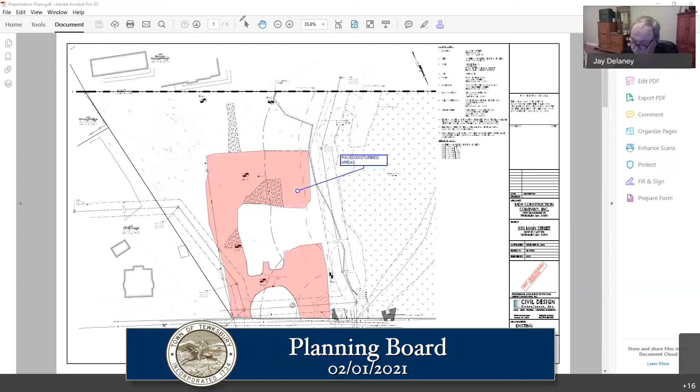I'm sorry, I'm on annotation right now. Let's see if I can turn that off.

There we go. This is the layout we have for you tonight, largely the same layout we presented conceptually back in October. The plan is to consolidate the two curb cuts into a single curb cut, which gives driveway access to the 9 structures, 8 of which will be townhouse style duplexes—4 on the left-hand side and 4 on the right-hand side of the driveway.

Each of those is a 3-story unit, which is the height requirement for this overlay, and each is a duplex. The last building is a 3-story building with an office on the first floor, and residential units on the second and third floors, making a total of 18 residential units plus the office space on the first floor. The applicant has indicated he's intending to have his own office there, so there's already a use in line for that commercial space.

In addition to the mixed use development portion, part of the land purchase agreement with the town was to provide 20 parking spaces for the Tewksbury Housing Authority, shown at the rear of the parcel, right on the property line shared with the Housing Authority property behind. Those 20 spaces will be dedicated for use by the Housing Authority. There's no plan to touch the floodplain overlay, so we're filing for special permits under the town center overlay district.

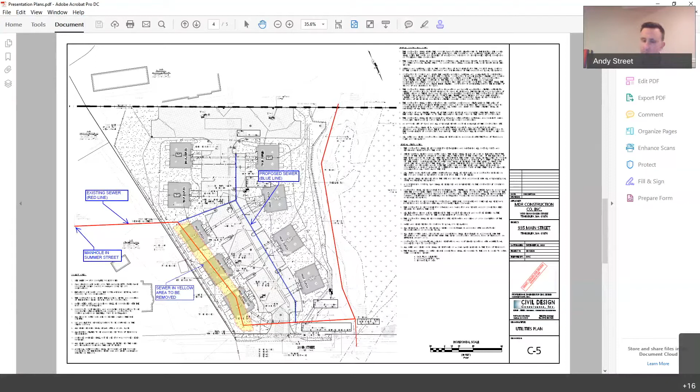To allow this development, we are requesting 2 waivers, one of which is a waiver to allow these parking spaces for the Housing Authority to be within the required setback from a property line. We could pull them away, but the intent of those spaces is to best serve the Housing Authority, and getting them as close as possible is desirable.

So we do want to request that waiver to allow that. The second waiver we're requesting relates to these duplexes—according to the parking table, they require 3 spaces per unit. If these were triplexes or a bigger multifamily building, it would only be 2 spaces per unit required, and we're requesting relief to provide only 2 spaces per unit. We do have adequate parking for the commercial space as well, and those would be dedicated parking spaces.

As far as permitting goes, we need the permits mentioned from this board, and then we'll continue working with the Conservation Commission toward hopefully an order of conditions. And because we're tying into Main Street, doing some work in the right of way, we'll need a highway access permit as well.

So moving forward with where we stand, we received comment letters from the fire department, the Conservation Commission had that meeting as I mentioned, and also from town planner Ms. McGinty, we received her comments late last week. As far as the fire department goes, there were some general comments from the fire code listing requirements that need to be met.

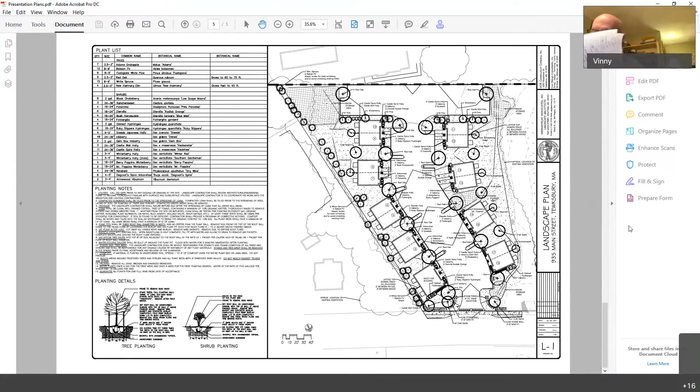Another question I had while I have you here is, this is probably for Mr. Street—on the plans you have the location of the mail receptacles. Now how does that process work? Does that go in front of the postmaster first, get approved, and then come to us?

Well, we've done several of these projects with mailboxes at this point, so it's kind of evolved on our end. My intent here was to acknowledge that there will need to be a community mailbox, and if there's any feedback from this board that might change the layout, things can happen at this early stage. But once we got to a certain point, it would certainly be coordinated with the postmaster and signed off on as far as location goes. So right now it's really more of an acknowledgement that a mailbox will be needed, and we'll take it from there and work with the post office.

I can also speak on my experience at 1390—we did exactly what the post office wanted. They wanted a community mailbox, they consented to the location, and we built exactly what they wanted there. There's been no problems at 1390. Okay, that's good to hear.

So I guess, Mr. Street, what happens if they don't like that location—is there another alternative spot you can put it? Yeah, I think we have several options, and we've had a pretty good working relationship with them too, trying to figure it out as well.

Okay, yeah, I'm confident we can find a suitable location for them. Great.

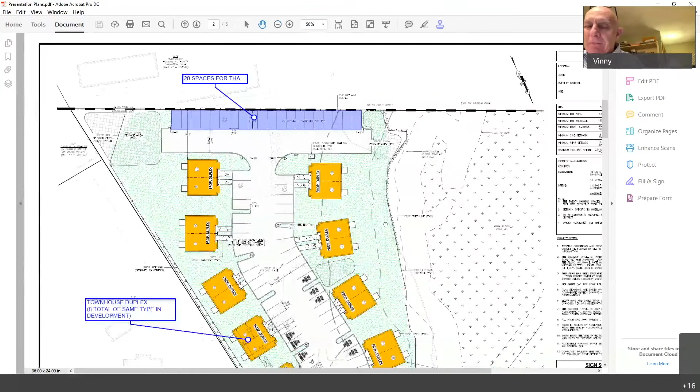I'll ask one more question and let my other board members kick in. So you don't have approval from the fire department yet, correct? No, we do not have approval, I guess. We got a comment letter with a handful of standards and requirements we need to meet, and we feel like we meet them. So I would expect future correspondence, but we'll certainly respond to what's in that letter and see what comes next.

Yeah, okay great. All set, Mr. Chairman, for now. Thank you.

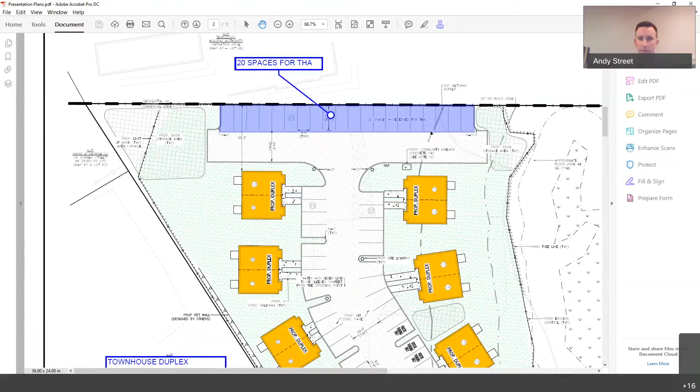The next thing - in every project we've had, we've talked about sidewalks. Do you think we should have a sidewalk at least walking to the mailboxes? Well, one of the comments was the sidewalks on Main Street, but the sidewalk on Main Street isn't going to get them to the mailbox. I believe the mailbox is going to be right off the edge of the parking area. Have we found a location for it yet, Andy? As of now, we're showing the mailbox towards the rear of the site. It's on the plans, towards the rear of the site here, but we'll coordinate that with the post office as well. I see it right there now, Andy - it's easy access to the mailman. Correct, and they would walk on the pavement to get there. A sidewalk certainly wouldn't be a big deal, but it's just another added expense.

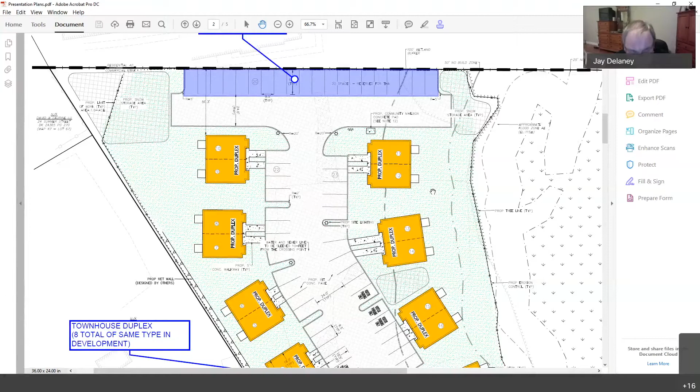Like I say, we've dealt with all our projects, and I don't see any - how does, shouldn't there be sidewalks at least if the people are walking? It's just something I think should be looked at and decided upon, because I haven't heard any of my board members bring up the sidewalks on the property. And not to be a smart guy, but if the project doesn't get approved, where do we put the trees back? I can't answer that question. Okay, so the trees are cut. I have heard complaints - there was nothing put up, fences or anything else. As a matter of fact, some people could actually fall off the sidewalk. So the safety portion for elderly people at the back of that project has not been addressed. There is no sidewalk. And another thing that's hit me too, is if the sidewalks were there, the elderly would be able to use them to walk through the project to get to the bus, the Lowell Transit Authority. So these are the different thoughts I have in my mind.

This whole property originally was going to be for the Housing Authority, from what I understand, and it's not happening - not happening the way I think the state intended it. So these are the different things I am addressing with you, and I'd like to see it done. I'd like to see the buffer added between the parking spaces and so forth. I think what could happen here is that some of the units might be able to be moved a little bit to get that buffer in, or to do what we have to do to make it a better place for the elderly as well as the new tenants going into the property. And I think that will just about do it for me tonight.

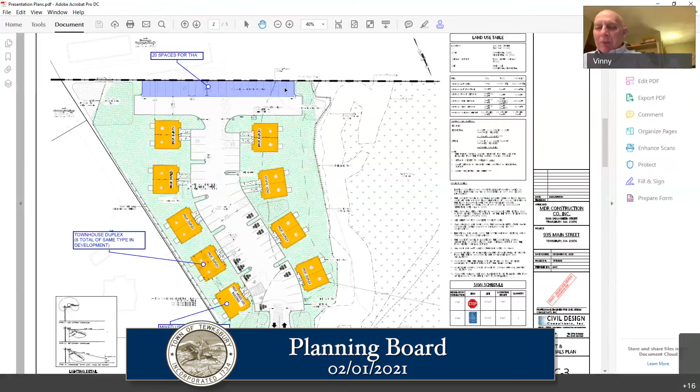All right, Chairman, I have some comments if I could. Mr. Fratalia. Thank you. I've been listening to everybody and it's all good conversation, but a couple things we haven't discussed: one is the fact that we need a lighting plan going forward. There's going to be lights back in that parking lot as well, so we need to see that. And the other question is, Mr. Street mentioned earlier about the affordable housing component and that all of them will count. In order for all of them to count, you need 25% affordable, so that would be 5 units. So that's not going to work as far as notifying the public that all of them will count. I don't think they will.

Okay. All right, that's it from me for the board. Thank you, Mr. Chairman.

All right, so with that, do we have anybody on the line who wishes to call in? We have no callers at this point, Mr. Chairman, but we are. All right, I'll stretch it out for just a moment.

So just as a recap, you guys are going to put together something on the buffer/fence/something in the back section there with the parking. Try to pull together the RFP information with a packet, that way we have that, and address some of the rest of the questions that some of the board asked.

We usually only need about 30 seconds to see if anybody's going to call in, so I didn't stall for that long, but you don't have anybody calling in, correct? Oh, Mr. Chairman, if I may. Mr. Rada. Yep, thank you.

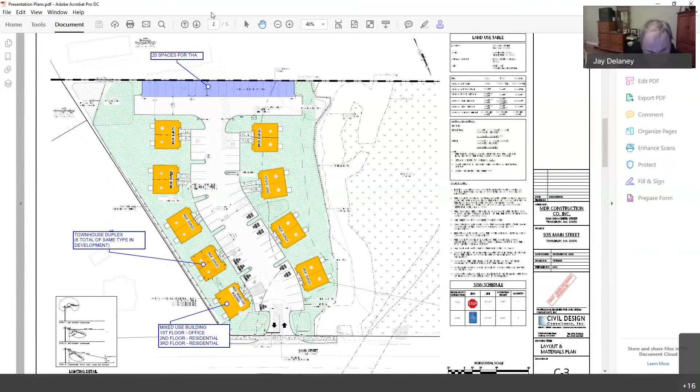All right, moving on to agenda item D, 1650 and 1668 Shawsheen Street, modification of site plan special permit.

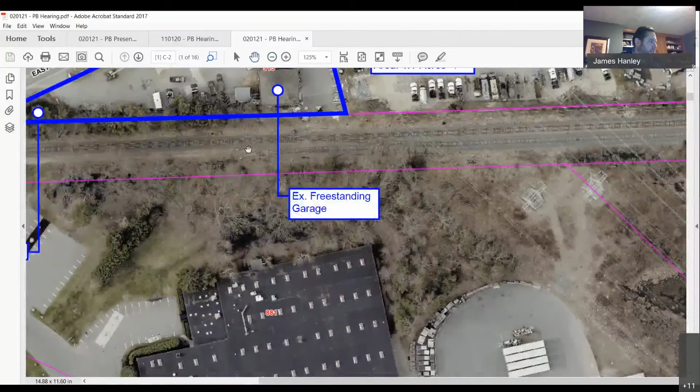At the time we came in front of you, it seemed fairly straightforward, and since then it's kind of evolved a little bit and caused a little bit of a delay. I'm just trying to explain that. So we have this freestanding garage, and the plan is to come down here with a garage addition over existing pavement.

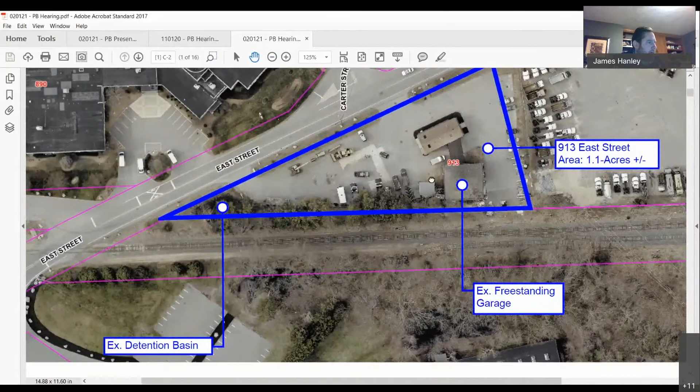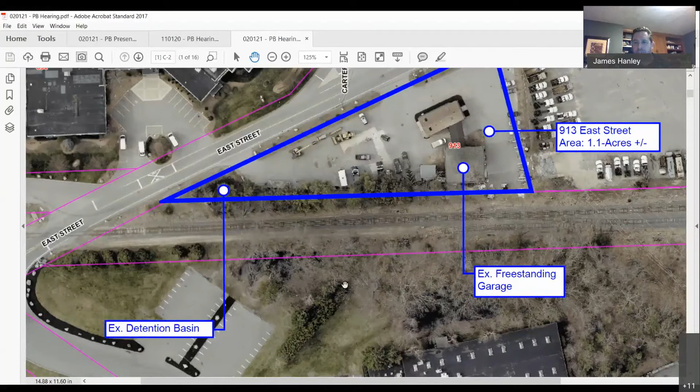Around the last time we sat down with you, we were unaware of a wetland that was actually located across the train tracks, on the abutting property. Our development is within 100 feet of that wetland, so that brings DEP stormwater management regulations into play, and it also brings Conservation Commission's regulations into play.

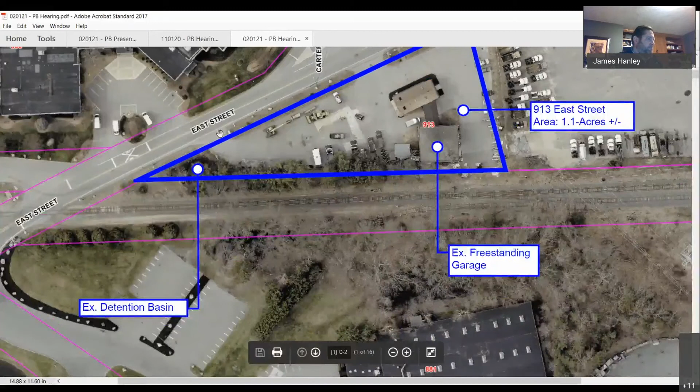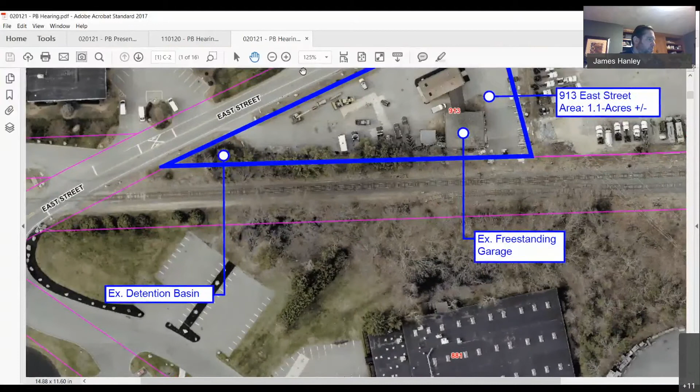So we spent a couple of revisions back and forth with DPW, really trying to get on the same page. That's really what we've been doing since the last time we were here. Now, a week ago Friday, we got a review letter, and we're in the process of trying to address hopefully the final technical modification for that. If you have a minute, there's a couple of items in there I'd like to walk through with you, just to get on the same page.

So we received this letter - this is a review letter dated January 22nd. Basically, I have four things I want to run by the board in general, get some direction, then we can finish this up hopefully and get it back and be in front of you next time for an approval. The first one comes down to a recommendation from DPW that we solicit the abutter for a drainage easement onto their property.

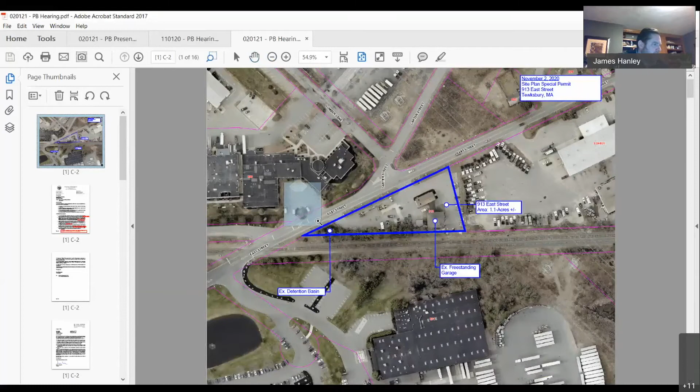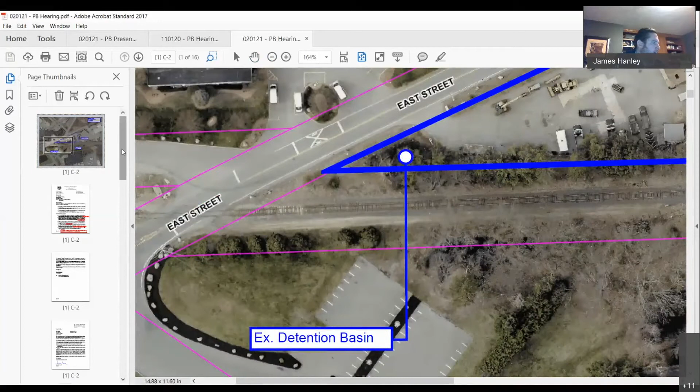We've actually got an existing detention basin that I labeled here, and this pond essentially just discharges over onto the abutting MBTA property. It's more clearly shown on the existing conditions plan here.

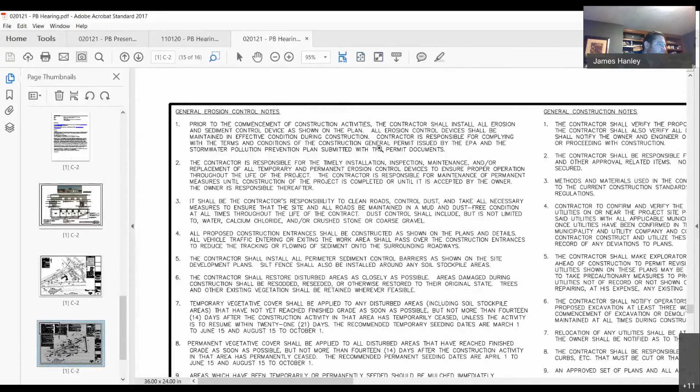But we have a situation where we actually have slightly more impervious surface, but because of some of the provisions we've made with regard to stormwater, including a subsurface recharge system and modifications to the pond itself, we actually have slightly less runoff going onto their property. It's an existing situation, and they've been notified as an abutter. So there's this recommendation by DPW, but I'm hoping you can appreciate the challenge it would be to try to get something like that in writing from an abutter for a situation that currently already exists. So I'm looking for some feedback on how to move that forward.

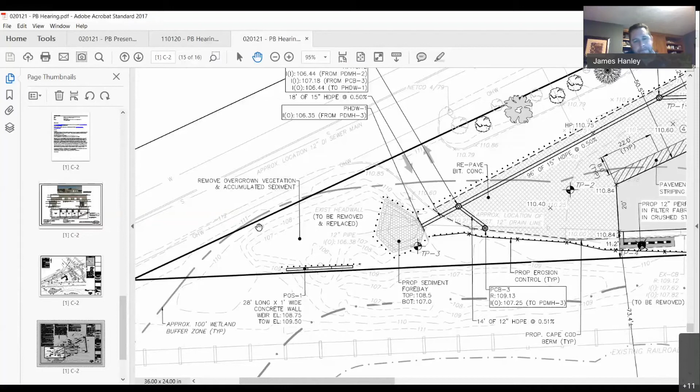Do you want to take them one at a time? Okay, I can run through the rest. So just to follow up on that, Jim, it's been over 35 years that detention basin's been there.

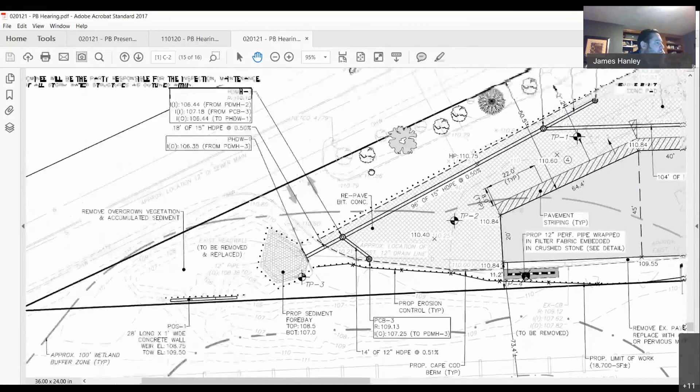So that's one. Number two is there's been talk about sidewalks. We've got 516 linear feet of frontage that goes along the property. We definitely appreciate the town's effort to provide sidewalks on all of these project frontages. The challenge that we have is first it's obviously cost - it's significant for a project of this scale, in the range of $50,000 to $100,000. But also it impacts drainage on East Street if we were to do that. So we were looking for some feedback on whether or not the board in this particular case would consider allowing for a grass strip between East Street and the sidewalk.

We've actually got 10 feet of landscaped area between the existing edge of pavement and the property line. What that would allow us to do is put this sidewalk in and not require significant drainage and curbing improvements that would really drive up the cost of this. So that's the next thing.

We do have one comment specific to stormwater management. Without getting into the weeds of this, because the site is previously developed, it's considered a redevelopment project, and because of that we get certain relief from strict compliance with the regulations. But we have to meet a standard that's considered maximum extent practicable, and myself and DPW have, I guess, a disagreement on what maximum extent practicable would be in this case. So I'm trying to get a sense for who makes that decision, and we'll work with whoever, obviously, to do it - we want to do it. But I just need direction so I understand who I'm answering to as I walk through these pieces.

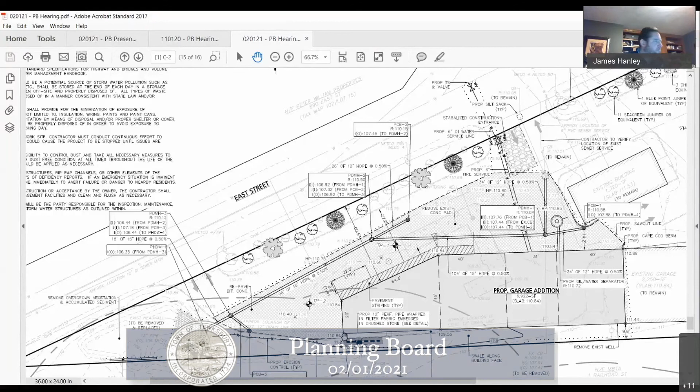We've got abutter comments here. We want to make sure that we address them. Specifically, they have to do with noise, trucks, landscaping, hours of operation. I just wanted to address this on the record that this use is going to be very consistent with what is already out there. The site is already used as a staging area for commercial equipment. They're actually going to have a little bit less area to place those trucks because of the 7,000 square foot garage addition. So hours of operation are going to be the same, and the amount of trucks within a relative amount are going to be the same. It's really going to be kind of the same use.

We're just going to try to really clean this thing up. The last thing I'd add is that you had mentioned last time that you'd like to see some additional landscaping. If you look at sheet C2, we've added 11 junipers, Seagreen junipers or equivalent, and a handful of cherry trees. So we tried to enhance the existing landscaping. There is some landscaping out there, and the idea is that we'd be able to put the sidewalk off of the edge of pavement close to the landscaping and green things up or soften things up along that stretch. So those are really the three things I wanted to try to get some feedback on.

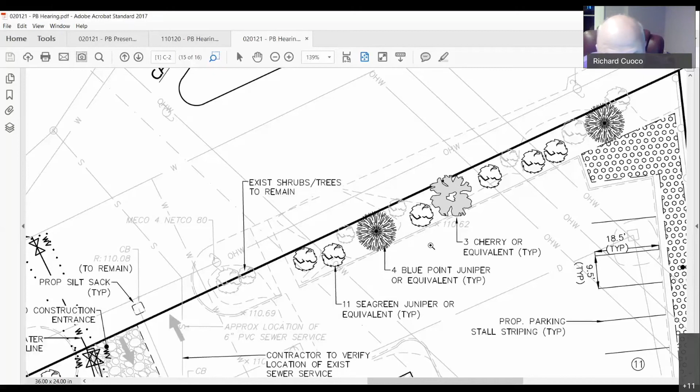As far as the hours of operation, we always just like to remind the board that there is an exception when we have a night like tonight where snow, these landscape companies that are in there, may have to bring their equipment in and out on a storm evening. So I think the board in the past has, when they put into their hours of operation, a little caveat in there relative to late night operations just to get trucks in and out for snowstorms. I just didn't want that to go unmentioned.

Thank you. All right, thank you, Mr. Cuoco. Mr. Ryder, we'll start with you. All right, thank you, Mr. Hanley, I believe.

I would have to defer back to Mr. Hardiman on this. I believe even a modification of the property would require, under the new regulations, that you notify the abutter and look for approval to discharge onto that property. Even though it's existing for 30 years, that regulation wasn't in effect then. So I believe any discharge onto an abutter's property would require meeting the new regulations. That would be part of the MS4 requirements that are regulated by the state and ultimately enforced by the town. So that would be considered an outfall, and all of those outfalls are regulated to be tested annually, and it would be required for an abutter to meet those new requirements.

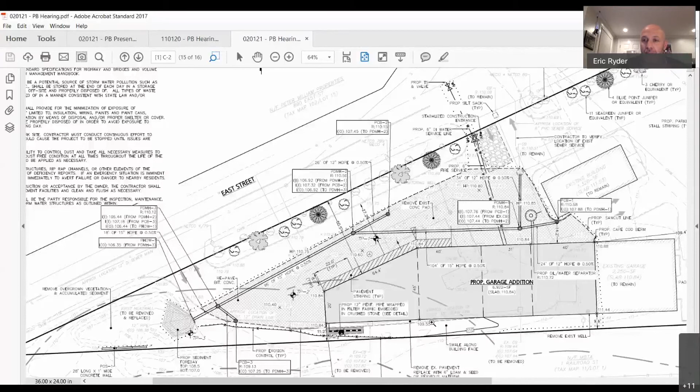Okay, but I don't believe, I may stand corrected here, but I believe that falls back to the authority under the Department of Public Works, who's permitted through DEP. I don't believe that we have the authority to waive anything. I would have to do a little more research on that. I wish I had the letter, so I could have done a little bit more research into that prior to the meeting. So, okay.

And then there was one, you came in broken up, and maybe it was just me on my end. You were looking for relief on the second article, outside of the sidewalk.

Because this is redevelopment, we have to comply to the maximum extent practical. Formal compliance would require removing 44% TSS before it goes into an infiltration basin, which is an existing basin. The only option is some sort of hydrodynamic separator, like a Stormceptor or something similar. Practically speaking, that's the only option we have. Street sweeping and the hoods and sumps remove about 29 to 30% of the required 44%, so we'd be looking to invest some $20,000 to try to address that.

So the question is, who determines that maximum extent practical? In this case, this is in front of the planning board and not in front of conservation or the DEP, but I'm getting comments from engineering. I'm not clear on that. I'm going to try to address this as best we can with DPW, but I'm looking for further direction from the planning board.

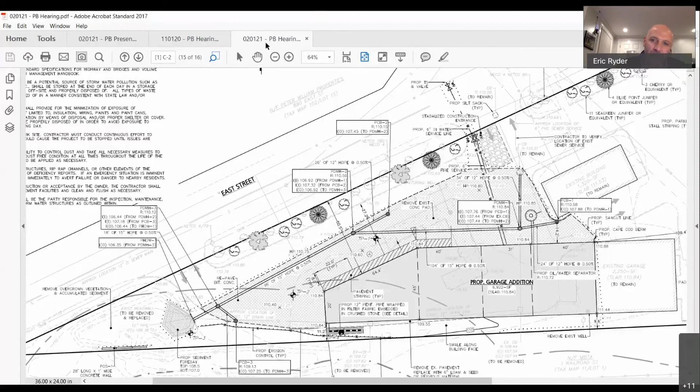You probably will end up with water along the edge of the roadway if there aren't any drainage improvements done there. So what's your intent on the sidewalk? Do you have an illustration of what you intend on doing there?

No, I don't have an illustration, but I wanted to talk this through. If you can see the dark heavy line, that's the right of way line. I have the dash line here, that's my edge of pavement line. I have over 10 feet on average across this, and right up against the edge of pavement I have existing utility poles. So the easiest solution is to provide a 5-foot bituminous sidewalk that would basically be up against our right-of-way line and offset from the edge of pavement.

That would allow that roadway to drain as it already does. It wouldn't require any additional curbing or stormwater or anything like that, and it would give a 5-foot buffer to any pedestrians traveling on that sidewalk. So that's a little bit different than what we normally do - usually it's a vertical granite curb the whole way, but in this case this is something I kind of wanted to ask about.

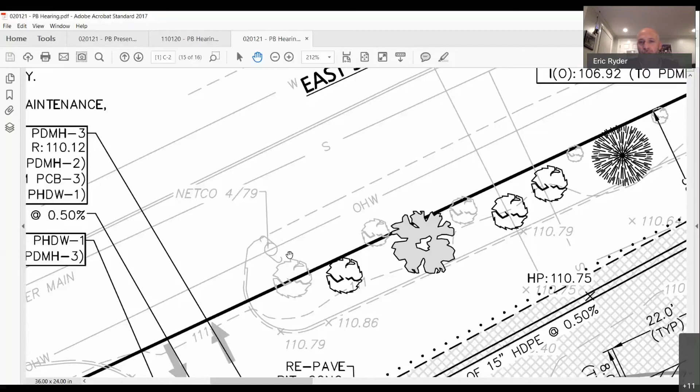Okay. The only thing I'm concerned about is without having any curbing there and having a grass strip, there's going to be long-term maintenance issues in terms of plowing. If you can expand that picture, you have that left-hand turn up to Carter Street. People tend to pass on the right-hand side, and with a grass strip there, that's going to continue to get worn out without any type of curbing.

So it would be similar to what's out there now? Ultimately that's basically what you're going to have, but you're not making it any better. The intent is to make the project better than we have. I'm just concerned about the long-term overall maintenance of that - who's going to be responsible? Is that going to be the parcel owner to maintain it? Because I think that's a lot for the town to ask.

Well, given the fact that we always have one landscape contractor or another as a tenant there, I don't think there'll be a problem with the applicant accepting the condition that he has to maintain that area from the edge of pavement to the property line. The other thing is we're trying to get some nice landscaping in there and don't want it in the right of way - we could pull the sidewalk back onto our property, but don't want the shrubbery and trees out in the right of way. So I think we have no problem with the condition.

I think it's almost a given now, but if the condition states that the maintenance of the landscaping has to extend out to the edge of the pavement, that's a condition we'd be happy to live with. Okay, I think Mr.

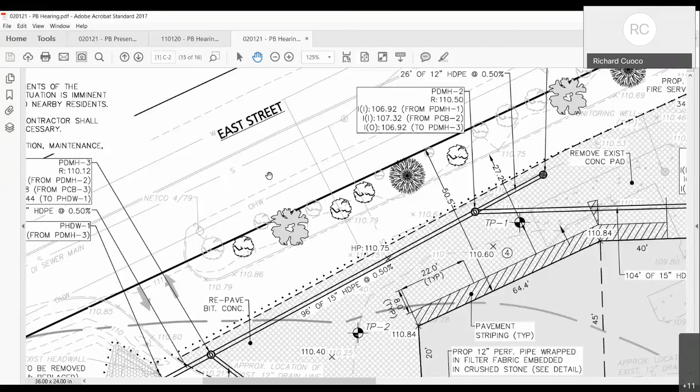Hanley, depending on what you have from the edge of your bituminous sidewalk to the edge of roadway, I think a stone, 1 or 2 feet of stone prior to the grass, is going to save a lot and look much better in the long run. You'll have vehicles driving on it, and the grass won't last, but the stone will help clean up that area and address the concerns of the neighbors.

Just my opinion as one member. And I'll do a little more research, and I'll reach out to Mr. Hardiman on those 2 issues as well. Thank you, Mr. Ryder. Thank you, Mr. Chair.

Chairman, I concur with Mr. Ryder as far as a lot of his comments, and again, I defer to Mr. Hardiman to get us some feedback on some of his needs and requirements also on the site. It's a very tricky situation, but we refer to him on a lot of stuff. So again, I will refer to him and see what he says.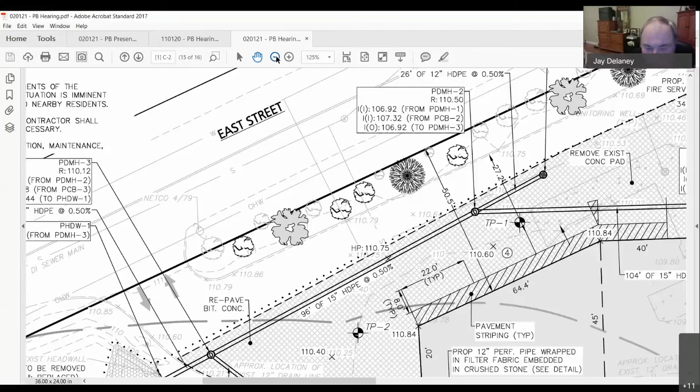Thank you. All right, Mr. Delaney? Yes, Mr. Chairman, I'm all set. The landscaping, I guess everybody has stolen my thunder. I agree with everything Mr. Ryder said and what Mr. Fattalia said. I think the project is a good project. It'll make that area look a lot nicer than it is right now. So I'm all for it.

Thank you, Mr. Delaney. Yeah, the only thing I'll say, everything else, I'm fine with the sidewalk resolution working out that way, that we figure out a way to pull it back so it works. That's fine.

On the issues you were looking for some guidance on, the one thing, and I know Mr. Ryder's going to look into it, you guys are going to have to look into it some more to get a little more clarification. My thought on it was that, at least on that first one, where it said they were recommending — the difference between recommending and requiring tells me the answer to whether or not it's completely up to them. Because them recommending it as opposed to requiring it makes me feel like if they really wanted it and could insist on it, they would have just said you have to do it. So I have a feeling this is going to come back to us to make a decision.

So we should probably start to wrap our head around the fact that that may be where we end up. I'm not sure on all the questions without them all in front of me. I can't be sure, but that tends to be the difference when one of the other entities is the one who's going to control it. They seem firmer in their language that it's their decision, not up to us. The fact that this was left more ambiguous makes me feel like they couldn't insist on it, and it may come back to us. But I will wait till our next meeting to find out the answer to that question.

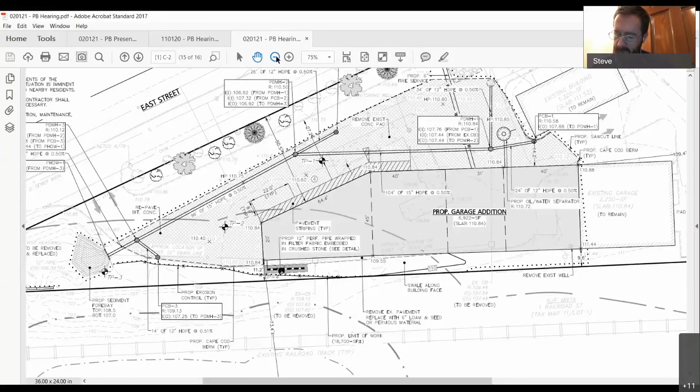We have a motion to continue this to February 22nd at 7:20. So moved. We have a motion made. Second. Motion made and seconded. All those in favor signify by saying aye. Aye. All those opposed? Motion carries. Mr. Ryder, aye. Mr. Fattalia, aye. Mr. Delaney, aye. Chair votes aye as well. All right, thank you. Okay, thank you very much.

All right, moving on to old business. Do we have any old business that anybody wishes to discuss? Hearing no old business, any new business that anybody wishes to discuss? Mr. Chairman, yes, I have some old business I'd like to update the board on.

For the Hilton Hotel special permit that was approved on North Street, I've been informed by Mr. Sadwick that the development's no longer going through. I believe they will be submitting a formal withdrawal, and potentially a new application. I don't have any further details, and I will send an email out to the group so Mr. Fowler has an update as well. All right, very good, thank you. Any other old business?

All right, hearing none. Any new business? Also hearing none. Correspondence. I believe the only one is the one we have in our packet, correct? Yes, Mr. Chairman. So I just wanted to bring to the board's attention the email that went out today from Mr. Sadwick on the changes to the Mass General Law Chapter 40A, the zoning act that was the bill signed by the governor. A hard copy will be going out in your next meeting packets as well.